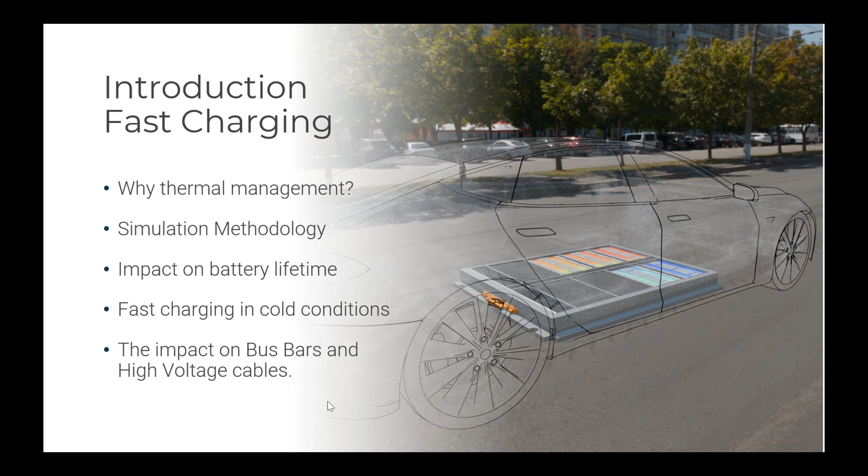Here I have a graph to explain the motivation of the study. So we see here the fast charging comparison of different brands. In green, you have the amount of kilometers that you can charge in 10 minutes, and then in blue, an additional 10 minutes. This was from May 2024. What you can see is that there's quite some variety in the amount of capacity that you can charge. This is, though, a very important parameter of a car. It's important for the OEMs to have good fast charging capabilities.

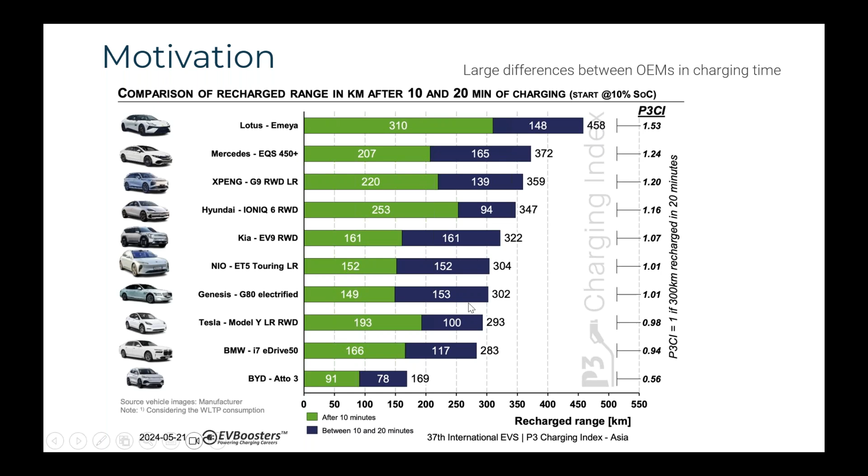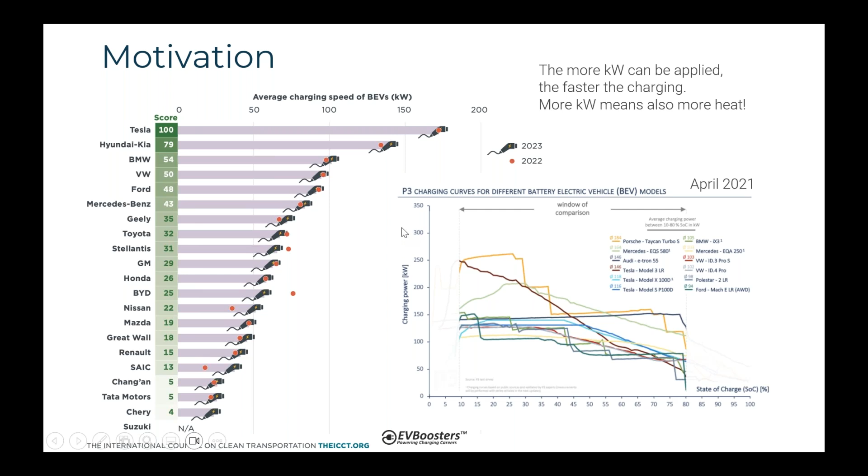Here, this chart is explaining that for fast charging, you can compare the amount of power applied. This graph is a little bit older, from 2022 and 23. But it's showing that there are quite large differences in the fast charging power that can be applied between cars. So the more power you can apply, it generally means the faster you can charge. But since we're all thermal engineers, we know that more power also means that you're generating more heat, and we need to manage that. All right, so therefore we'll look into the simulation methodology for battery thermal management with TAITherm.

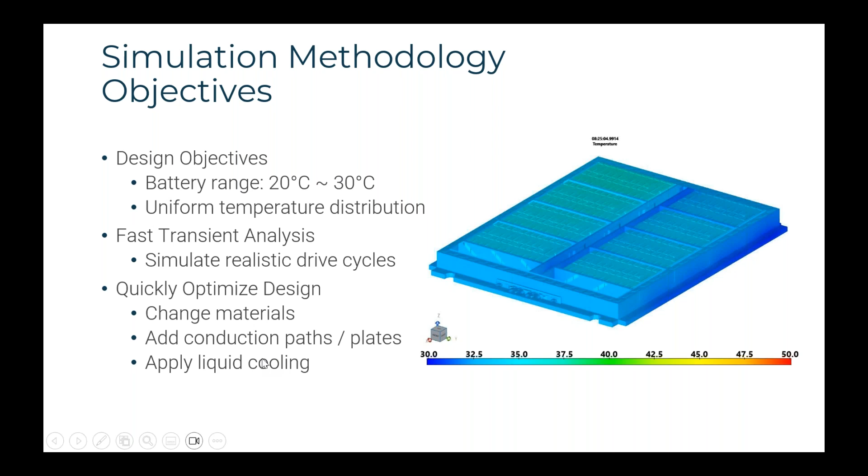So the design of a battery pack is to keep the temperatures ideally between 20 and 30 degrees C. But also you want a uniform temperature distribution. And you want to simulate realistic drive cycles. So in this animation, it's a realistic drive cycle with several fast charging occurrences. And you see at first that the temperatures, especially during the fast charging, go quite high to 50 degrees C. But also you see that there's not a uniform temperature distribution. This is important, and I'll talk about that later. Okay, so you want to optimize the design, change the materials, add conduction plates, improve the conduction, or apply liquid cooling. All these can be analyzed.

So we want to do 3D transient simulations. Many people are using 1D systems for the battery model, and that is very nice. You can do long transients, but in the end, it's only 1D, and you don't really get the temperature distribution. For the temperature distribution, often steady-state CFD models are used. However, you don't get the transient drive cycle when you do that.

So we're combining those different scenarios, where you have your 1D model that is controlling the battery for a drive cycle, with your current over time that goes into the battery pack, but also you want to control the cabin comfort. So how much energy do you need for the cabin? Because this is in the end all impacting your energy consumption. So with that, we can look at battery packaging integrated in the vehicle, do realistic drive cycles, optimize the cooling system, put the cells in series and parallel, look at hot soak, fast charging, thermal runaway, battery lifetime, and energy management.

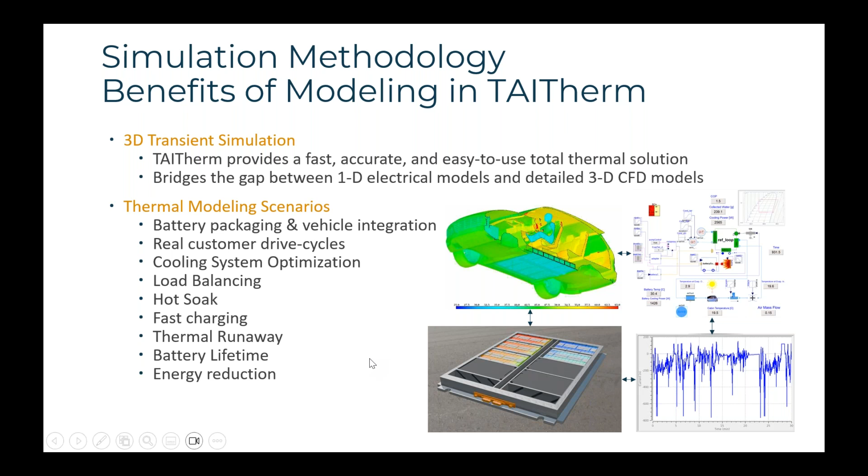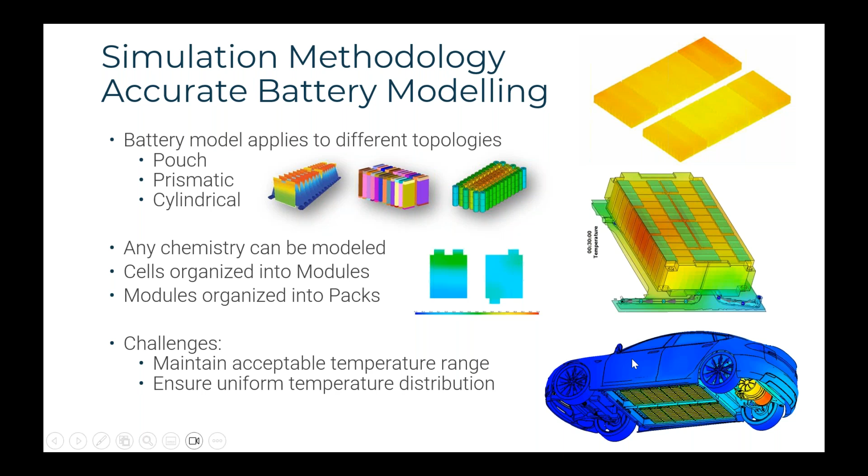So we can simulate all the different battery cells, so pouch, prismatic, cylindrical, and we can look at cell level, module level, pack level, or even vehicle level. That is all possible. For the battery modeling, we have our own battery model that we are coupling to the thermal solution. This is important because resistance of the cell is a function of temperature and depth of discharge. And the resistance, as we know, influences the heat that's generated through I squared R. So it's important to do this two-way coupling. And for the battery models, we have the equivalent circuit models, NTG, or the NREL equivalent circuit model that has two additional polarization resistance terms.

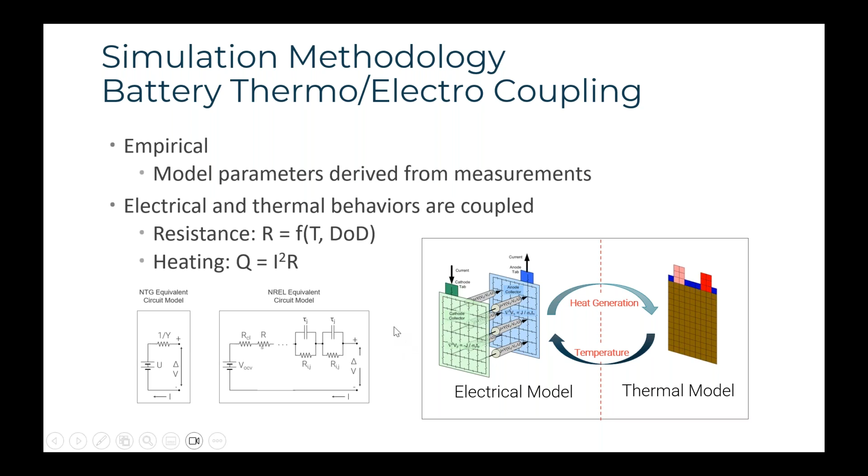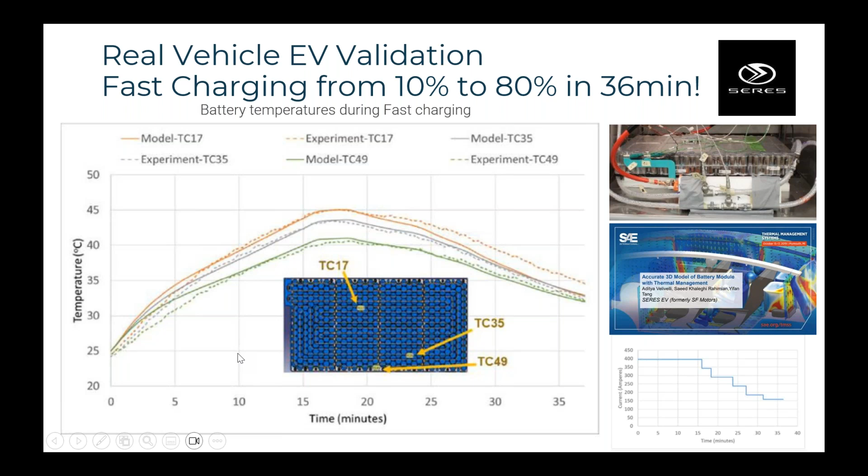All right, so having showed that validation, I want to show a bit more fast charging case studies where we're doing a realistic drive cycle and see how this is impacting lifetime. So we have implemented NREL's BLAST-Lite lifetime model. That is from the National Renewable Energy Laboratory. They have developed this lifetime model extensively. They do a lot of testing and validation. And this is their latest model that we have included.

And the nice thing is it has a library of battery cells for lifetime and degradation performance, because this is often hard to obtain. So we have that available. This newest release includes C-rate dependence, which is important for fast charging. And then, as the typical lifetime model, we're including calendar and cycling fade. These are different degradation: the calendar fade is mainly when the cell is stored, so not used. It's losing capacity. This is a function of temperature and state of charge.

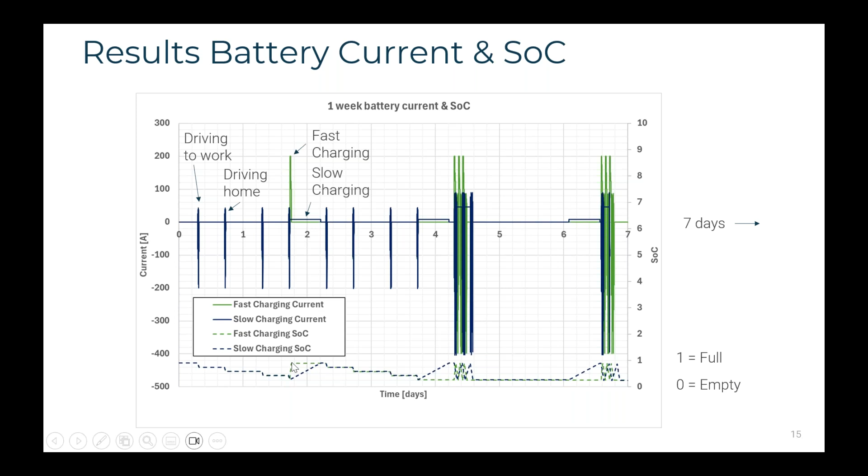Day 3, day 4, and then as mentioned, during the weekend we do a longer trip, which requires more intense driving, highway driving, let's say, with 3 charging occurrences. And in green we see the fast charging, 3 fast charging, compared to the slow charging, 2-hour slow charging. And on the Sunday back. And here this is the state of charge on the right axis. So when you're fast charging, then you're charging quickly. 0 is empty and 1 is full. So we have those differences.

Here are the temperatures, again for the 7 days. So during the week here, we see clearly the fast charging temperature peak, where the temperature goes to about 50. But then you see during the longer trip, we have highway driving. So the temperatures are already higher, but during the fast charging, the temperatures go almost to 60 degrees C. When you do slow charging, the temperatures still increase. It's a 2-hour charging, but not as much.

And then here in the dotted lines, just as a comparison, what if you have an improved cooling system? So let's say a very good cooling system, then the temperatures remain around 25, 30 degrees C, whether you're fast charging or not. So I thought that was very interesting.

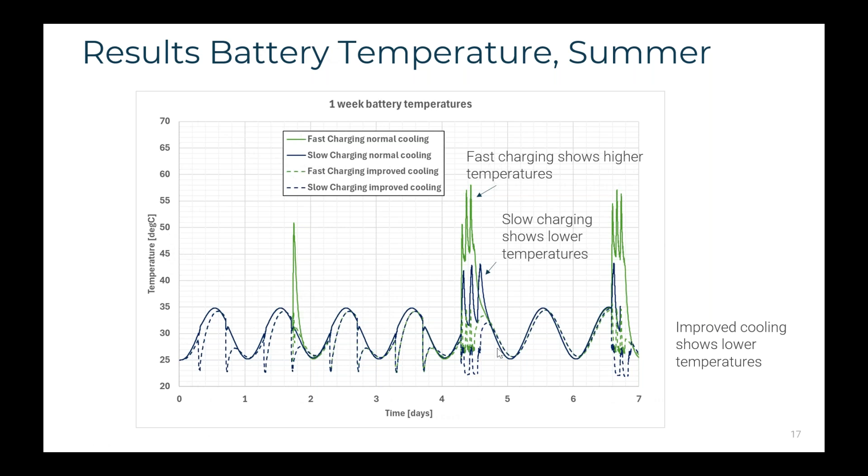And this is the impact on lifetime. So here is the time in years, this time. We're predicting the capacity loss over the years, taking into account different seasons like summer, spring, winter, and the capacity. So 1 means a full battery, and then 0.9 is 90% of capacity, 0.8 is 80%. So you have less and less over the years. And if you would do this cycle every week with fast charging, you see that the capacity drops really quickly. You reach 80% after 5 years.

That has a big impact and a big difference also compared to when you do slow charging. Then it's even above 85 after 9 years. So that shows the impact of fast charging. And then say you would have a very good cooling system. Then you see actually almost no difference between fast charging and slow charging.

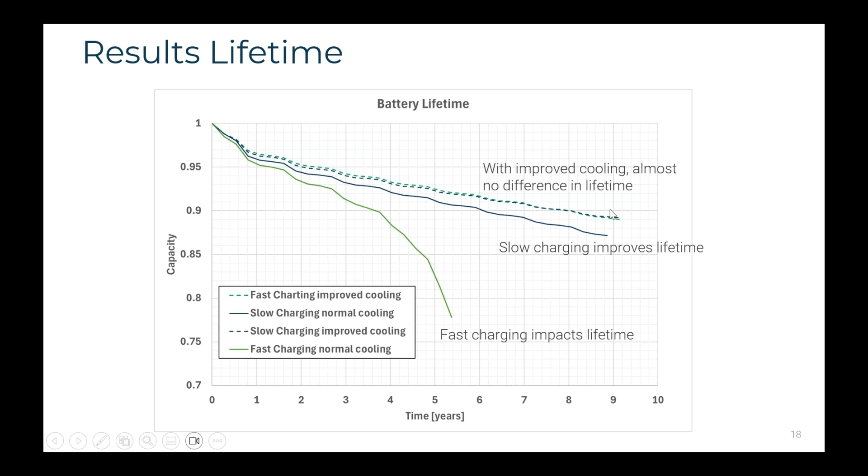That shows how important the thermal management is. All right. Here showing state of charge for the week. So how full is the battery for your cycle after 1 year, so when it's new, and after 5 years for this fast charging profile that degraded so fast after 5 years.

So you're doing the same cycle, starting with an almost 90% full battery. But you see, after 5 years, your battery is depleted more, 10% more, and this could get worse. You might not even be able anymore to drive to work.

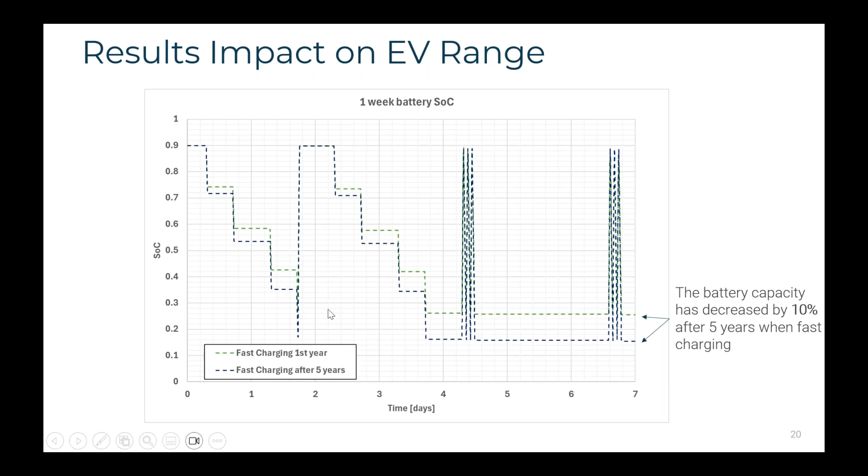Then finally, I wanted to show the 3D transient analysis, the temperatures. And we have a cooling plate underneath, which you also see. So cold liquid in on one side, going to the end and then back. So this leads to large temperature differences within the pack. We see the maximum during a peak in the weekend drive, it's 48, and the minimum is 34.

And typically OEMs aim for like a maximum 5-degree delta in a pack. But this is for large packs. This is very difficult, and we have already seen the impact on lifetime of such a big temperature difference. So that means that the cells that get warmer, they degrade faster over the years. So after 5 years, these cells would be more empty than the cool ones. Right? So this requires thermal management optimization.

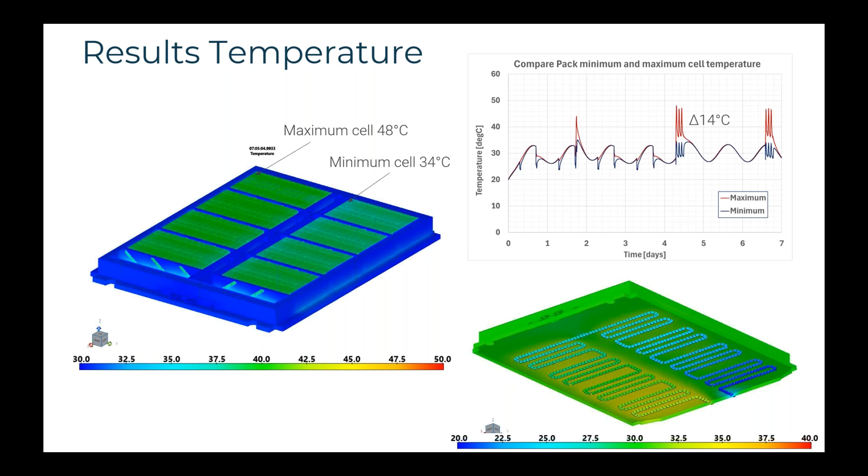All right, so we've shown the effects of the cooling system, fast charging, lifetime. Improved cooling leads to extended lifetime range, but also you need to look at the non-uniformity of the battery pack. So this is also very important.

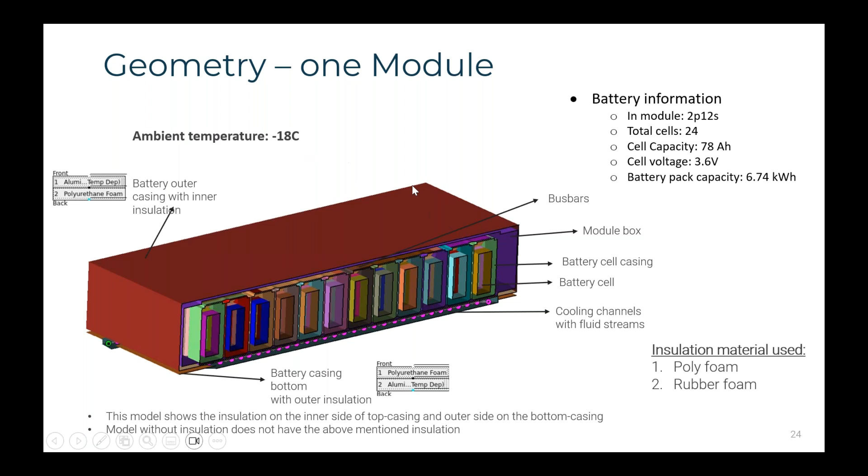All right, the next topic is fast charging in cold conditions. So now the ambient temperature is minus 18 degrees C, and we want to see what is the impact of insulation on the outside, because it's cold outside. So what if we put insulation, and then you see here a drive cycle. It's a different drive cycle. Let's say you will be driving here, and then you let it park outside in the cold, so soaked.

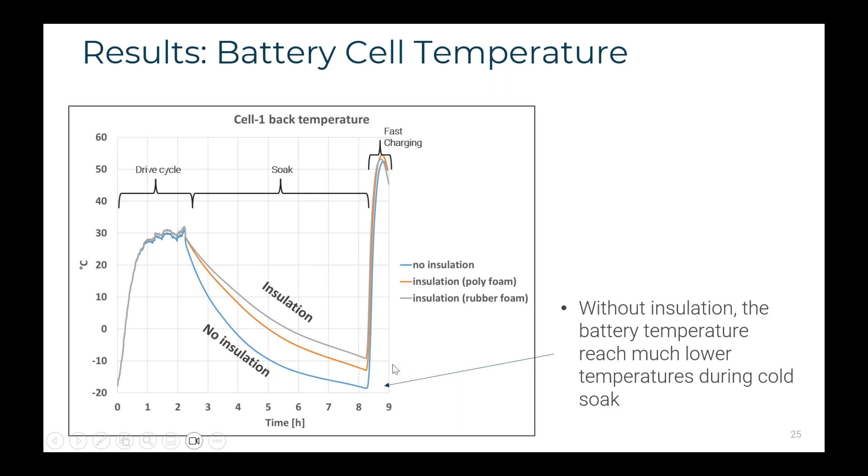And you see that without insulation, the temperatures drop much more. We almost reach minus 18 in the morning, and then we want to fast charge. Now, if the battery is very cold, it will be a problem to immediately apply fast charging in the morning because you cannot apply that much current in cold conditions. So that's the study that we're looking at.

So this is the morning where you want to fast charge, but without the insulation, you are starting at minus 18, while with the insulation, you're 10 degrees higher. So if you want to fast charge, you need to heat up your battery. It's very important. You can only apply current when you have higher temperatures.

So you need to heat up the system first. And if you have a slow heating system, then you see the temperatures of the cells also will slowly heat up. While if you have a good heating system, the temperatures will increase faster, which makes a big difference, especially when you're starting at -18. At -10, you also see this effect.

Now, this is important because it influences the amount of current that your fast charger can impose. I showed it in the beginning. So the more power you can apply, the faster it goes. But if your cells are not at the right temperature level, then you can only slowly increase the current. You see here, if you're able to increase temperatures, you go faster. But if you have insulation, like the yellow curves, you can apply even more current.

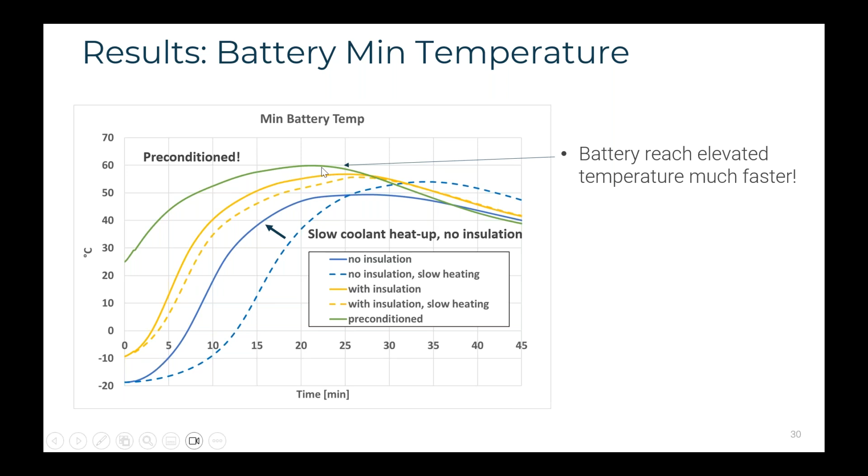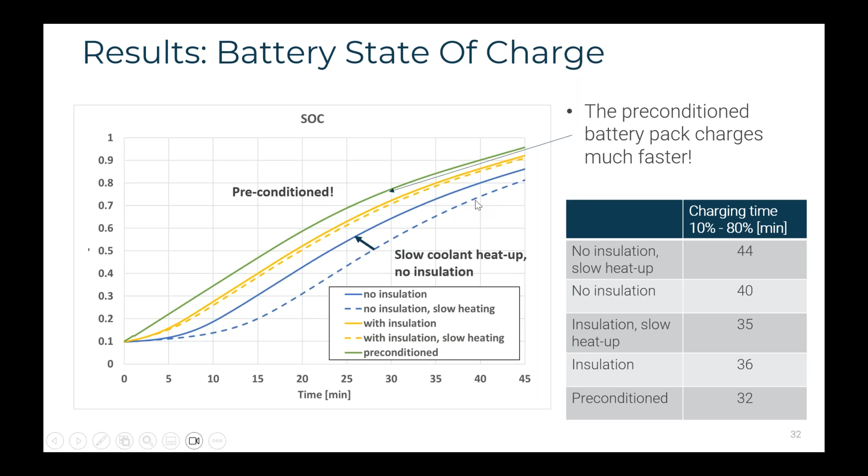All right. Now just showing the results. What if we precondition the battery, which is this green curve? So you can say, okay, I'm going to drive in the morning, precondition my battery to 25 degrees C, and then you're going for the fast charging. So you see the temperatures are much higher, more quickly. You can immediately impose a high current, which is good. And you see this improves the fast charging time even more. So you see the difference between those different scenarios.

All right, so I showed the effect of insulation and the effect of a good heating system on fast charging performance in cold conditions. Insulation helps, but especially the heating system is important. And of course, ideally, you want to precondition before fast charging.

All right, so now next we want to look at some components and how they are impacted by the fast charging. So for example, the bus bars. So we're applying here fast charging profile again, high current, over 40 minutes. And then we just want to do a sensitivity study of bus bar thickness, material width, thermal link contact resistance, cooling plate, insulation, cooling, etc.

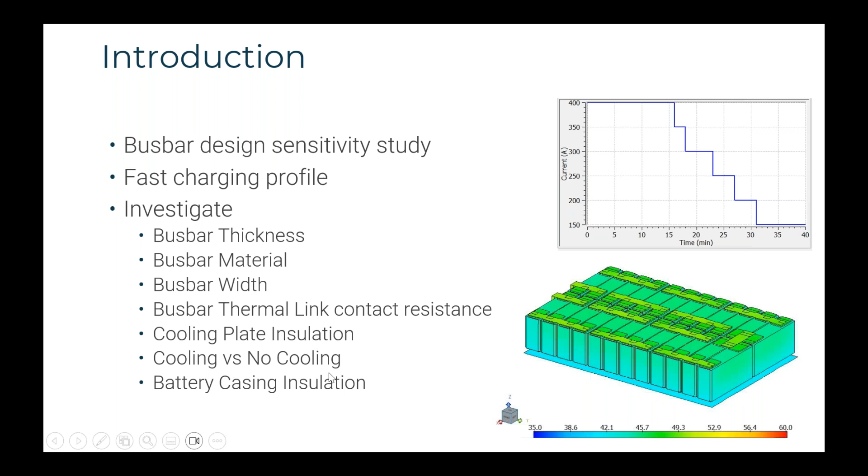So we have a similar battery pack in series and parallel. We apply the Joule heating here. So we have a Joule heating capability because we're applying current through a material, and then the material has a certain electrical resistance that depends on the type of material that you apply, like nickel, copper, aluminum. It also depends on the shape and the area. And then you obtain the heat from the Joule heating through I squared R. But the resistivity, the electrical resistance, is a function of temperature. So therefore, it's again important to do this two-way coupling.

And applying this, well, start with varying the thickness for a copper bus bar, 1 to 3 millimeter. So here are the bus bar temperatures over time on the left. We see that 1 millimeter goes to quite high temperatures. Well, it makes sense because it's very thin, so low mass. But with 2-3 millimeters, the temperatures are lower. The bus bar temperatures only minimally impacted the average cell temperature. So it's really mainly about the bus bars.

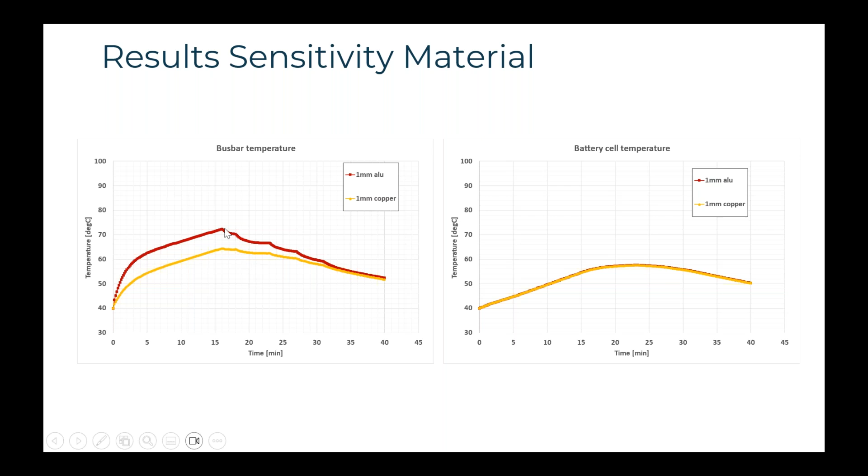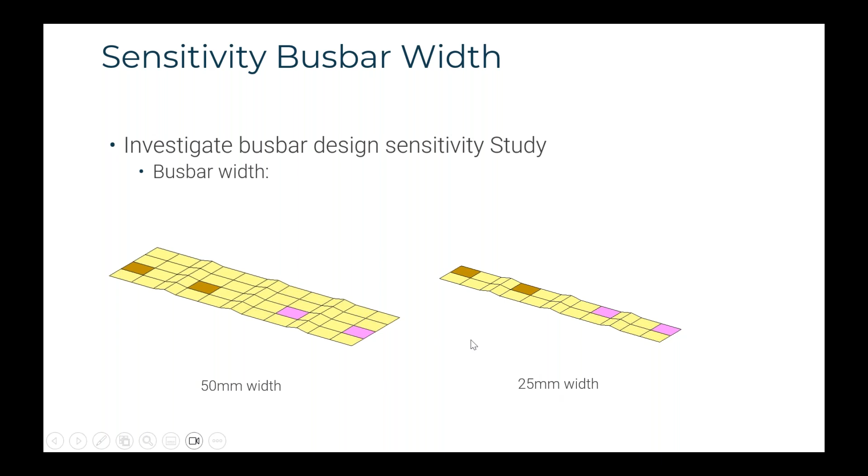The bus bar width. So yeah, you can have very wide bus bars or thin. So we compared 50 millimeter with 25 millimeter width. And you see that the thinner ones reach higher temperatures. So again, weight and heat play a role there.

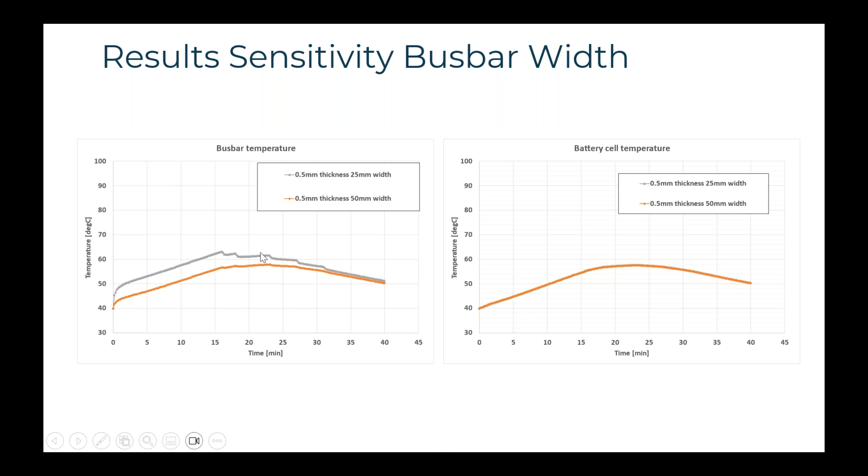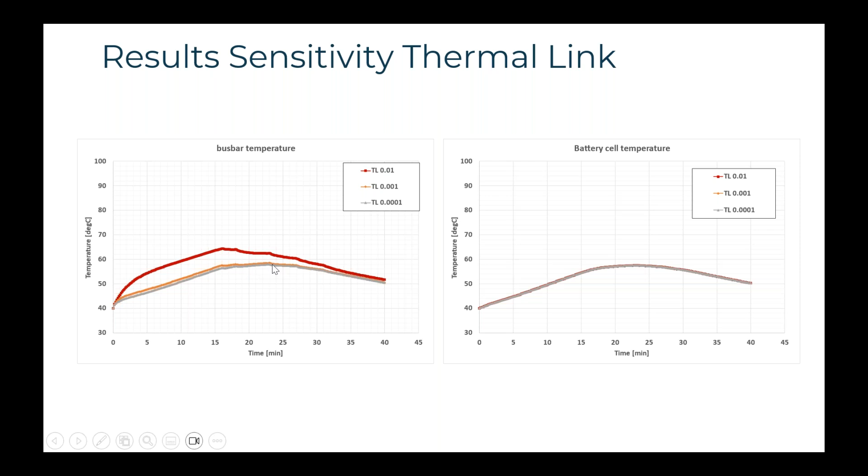And we see that with a very high contact resistance, which means there's not much conduction, which is not very likely, I would say, you get higher temperatures, while the difference between the two lower contact resistances is minimal. So I think that's a good sign because they are well connected. So you don't have much uncertainty there.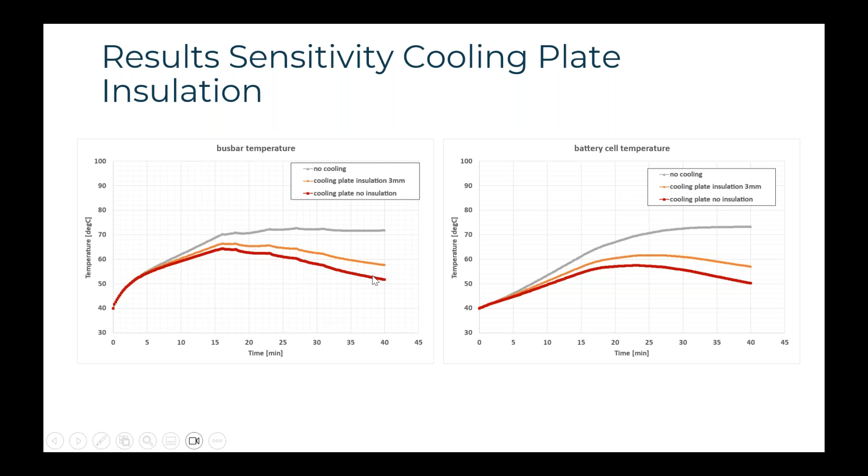Okay, what if we put insulation between the cooling plate and the cells? So here, if you have no cooling, temperatures stay high. If you have cooling plate but insulation between, then temperatures are lower. But of course, if you have direct cooling, direct contact with the cooling plate, then temperatures are lower. And now it's also impacting the batteries, which makes sense.

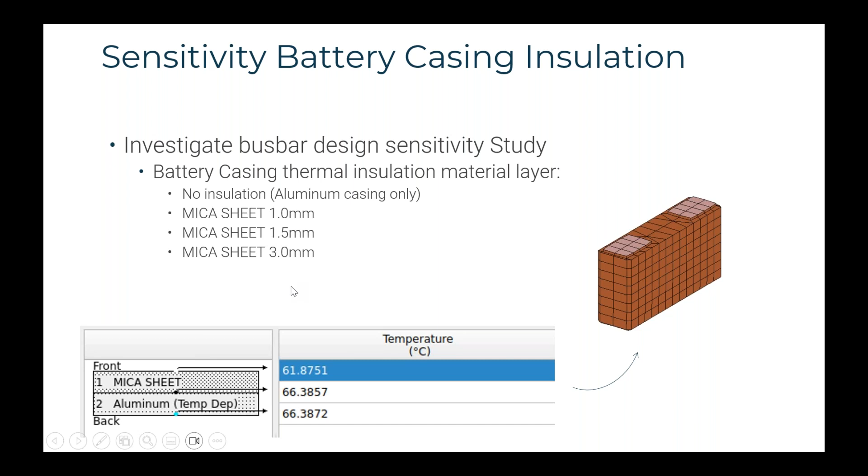What if you have insulation around the battery casings? Because for thermal runaway, you might put mica sheets around, so we have varied that. And by the way, you can very easily add those different layers without really meshing. You can add them virtually and define the thicknesses, which we can do for the bus bars and the cells and everything. Yeah, now we see that when you put insulation, you're protecting the cells for thermal runaway, but you're storing more heat in them, so they are much higher than without insulation. And the same for the cells, so I think that makes sense.

All right, so here just a summary of the busbar designs that you have here. So you see that the busbar thickness had a big impact on the maximum temperature. But of course, also cooling or insulation had big impacts as well. So yeah, these are easy to evaluate because the 40-minute fast charging scenario can be run in 10 minutes on a local laptop.

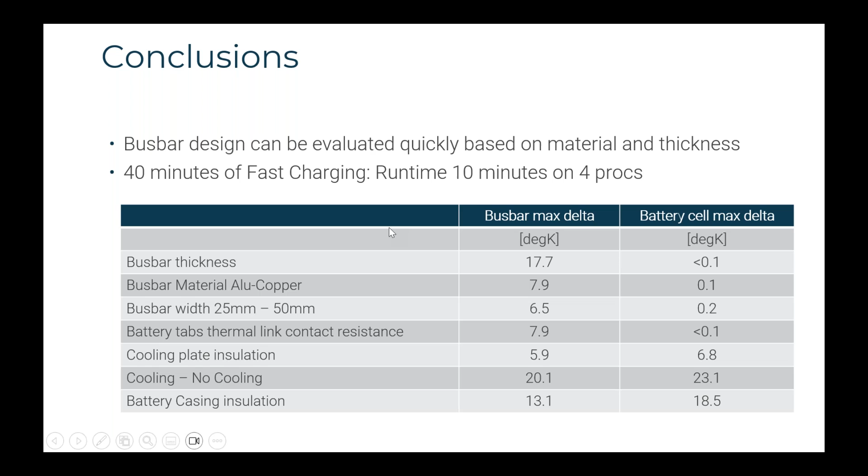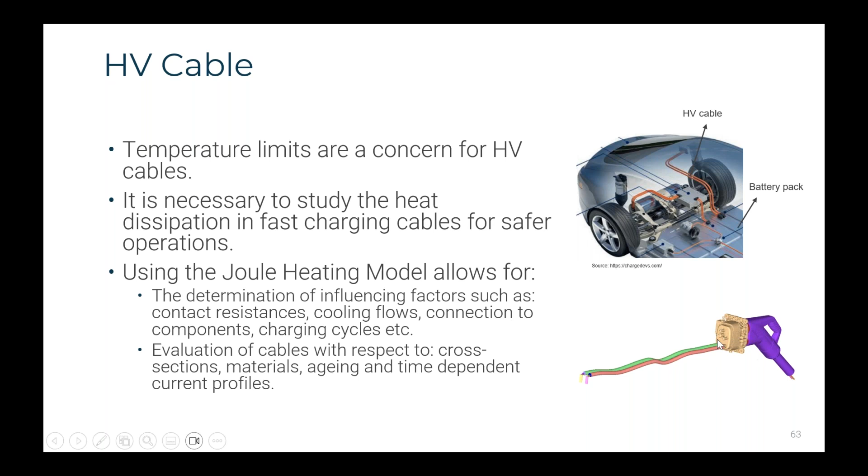Okay, the final part is looking at the high voltage cable. So you all recognize this fast charging cable that is connected here in the socket, and then you have some electrical cables that lead to the battery pack. So it's important, high current goes through, and it all gets very hot. Again, we're applying Joule heating capability. Here you see a close-up of the geometry where we have the socket, the connector, applying the fast charging profile all transiently. And we have also a cooling system inside because the temperatures get so high.

So then here on the left, you have the scenario without cooling, and on the right with cooling. So you clearly see the temperatures get much higher without the cooling, while they are in reasonable range with the cooling. Just zooming in. So here, especially here in the connection, there it gets quite hot.

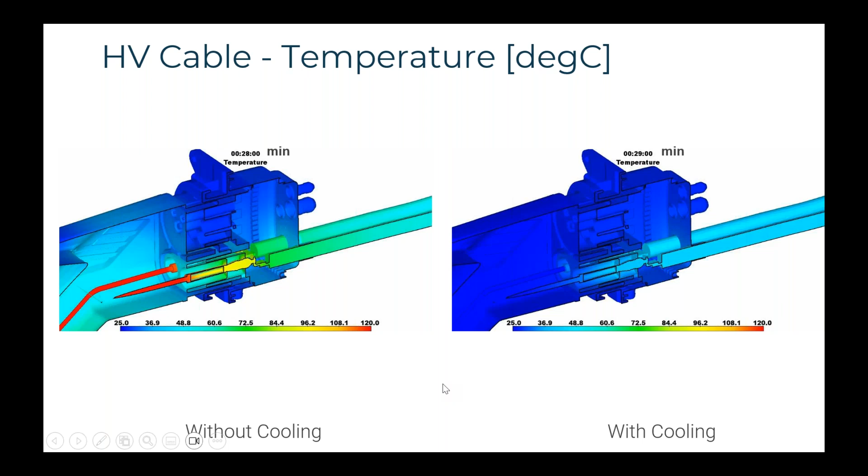And this is the imposed heat from the Joule heating that we impose. So we have a contact resistance. We're including that heat, and that is included. And then you have the voltage drop over the cable that you can predict.

All right. Very good. So that brings me to the end of this webinar where we showed the battery thermal simulation capability overview with Taitherm and how we can do 3D transient realistic drive cycles. And then look at battery temperature range, uniformity. How can we improve this? We've shown a validation. How is this impacting lifetime? And optimize the design for either cold conditions, temperature levels inside the pack or the bus bar and the high voltage cables.